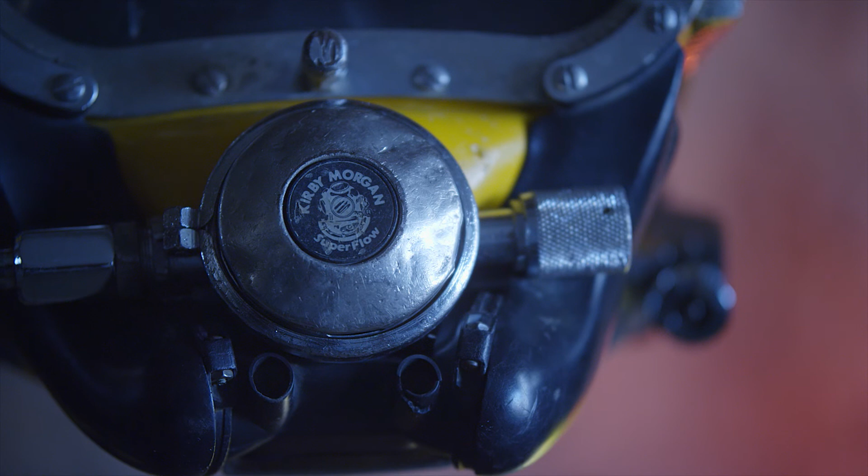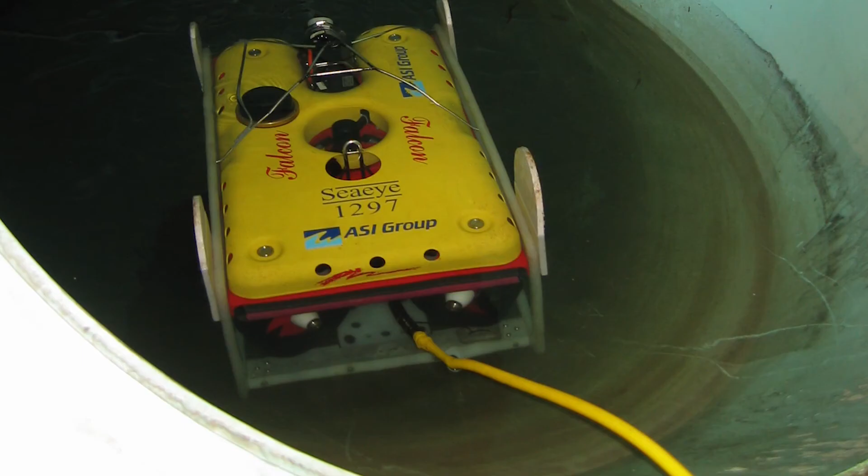ASI is a full-service marine engineering company. We started back in 1987 with the thought of providing strong technical skills with strong professional skills. I still remember our first office was above a welding shop. I think we had 500 square feet, and it was myself and two other people. Now we have 120 employees.

Back in 1990, 1991, zebra mussel infestation in the Great Lakes was hitting its peak. So we started doing mussel control, and based on that, clients would say, well, what else is in our infrastructure? So we had divers go in to take a look.

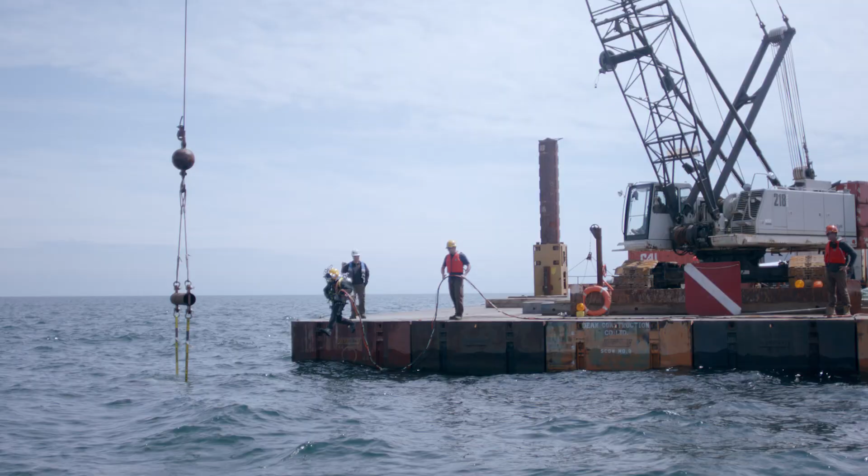What commercial divers can do that advancing technology can't do is give the actual physical hands-on inspection underwater. We're able to do deep water diving, welding and burning. There are times when we're swinging a hammer and nail underwater.

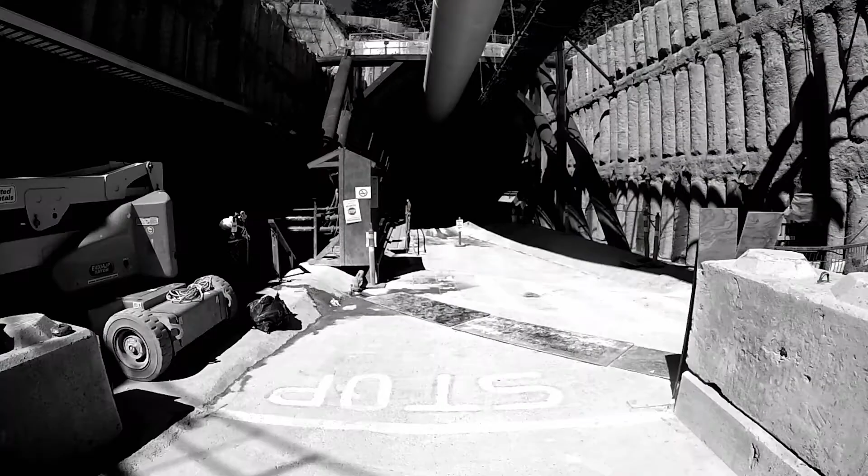Hyperbaric intervention involves putting people under pressure in front of a tunnel boring machine. When a tunnel boring machine goes into soft ground earth, that space is the same as being underwater. Our divers therefore have the experience of working underwater in the same pressurized environment. We're the only company in Canada doing this. It's very exciting and it's very demanding.

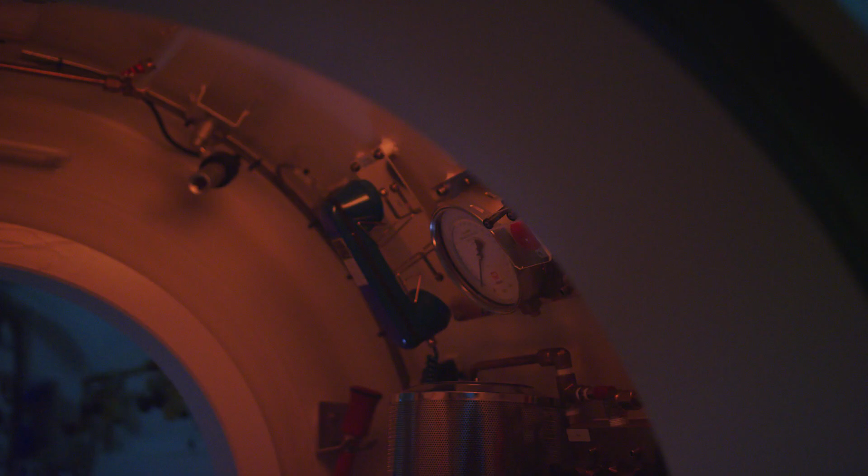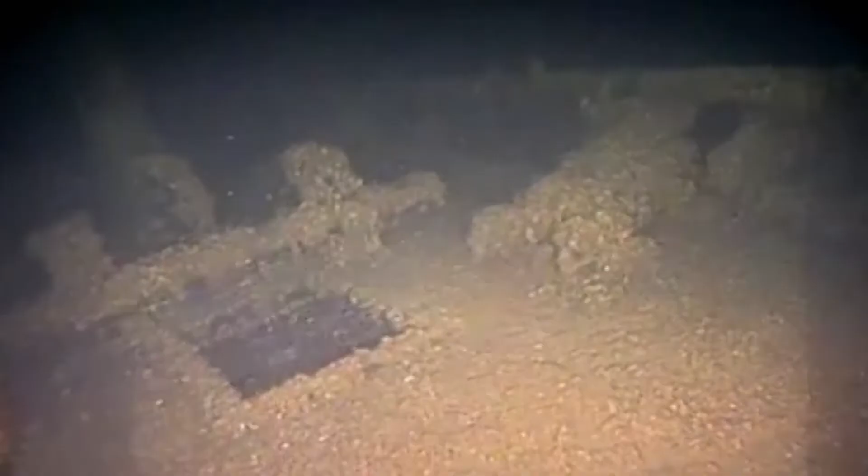Where it was too dangerous for divers to go in, we started employing ROVs, remotely operated vehicles. We saw an opportunity to develop a robotic system to handle those types of projects. We would provide sonar profiling, sonar imaging, underwater mapping, and bathymetric surveys.

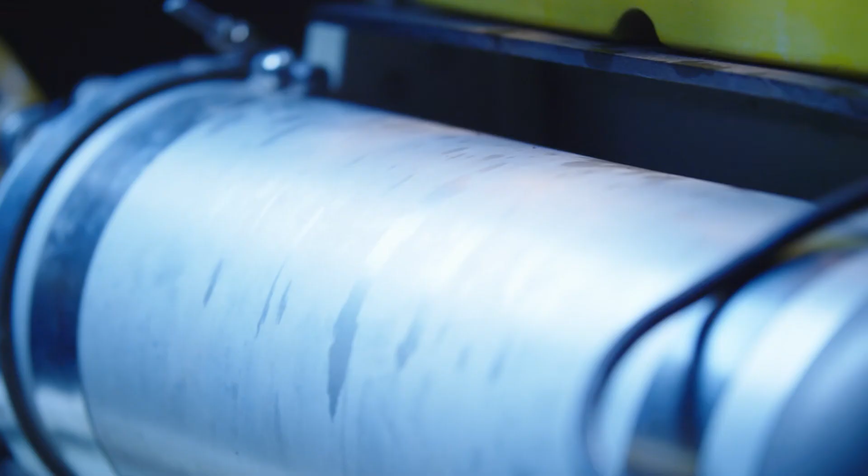The new vehicle that we have is a modified Mohican. The sensors on there have never been combined in that way before. That's what gives us the eyes - we can see in conditions that normally you wouldn't be able to observe in.

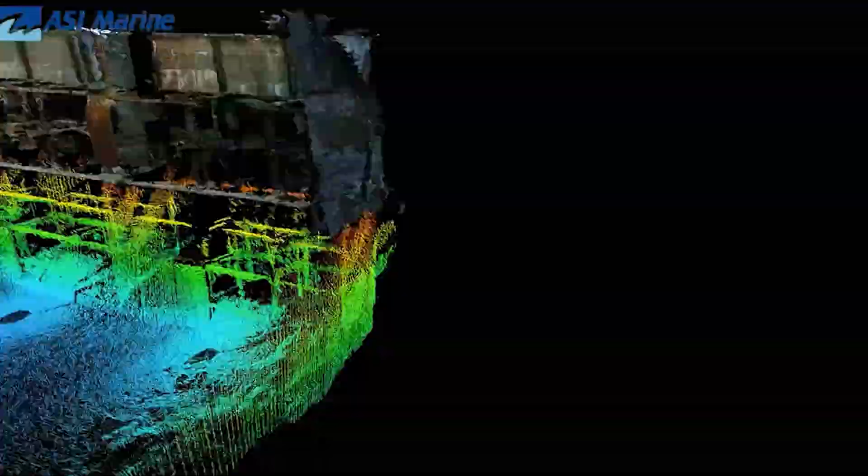With all that information coming back, we're able to recreate that tunnel in full 3D, as if you were able to walk down it. But I still don't think it'll ever be finished. We're always upgrading, always making it better, always working out ways to improve. You always want to be able to provide more.

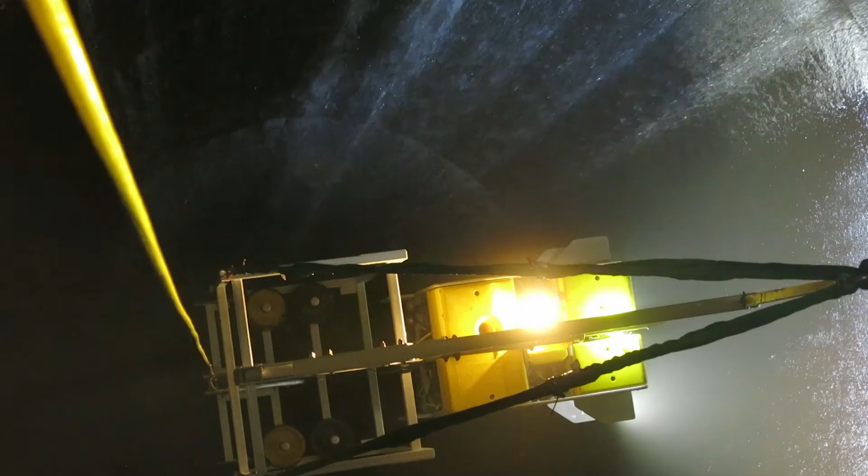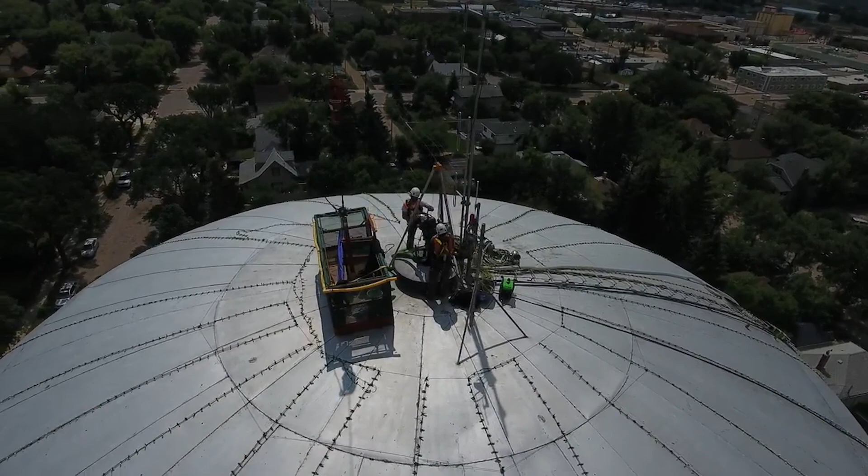We have been active internationally since 1993. We mobilize all over the world. Started in Peru, went to Finland, Australia, New Zealand. Right now we're in Scotland, we've got another one in France. We've opened up an office in Vancouver and in Chile. It's wherever it takes us. Strong technical with a very, very strong professional side - that's the premise that we started with, and it's still the premise today.

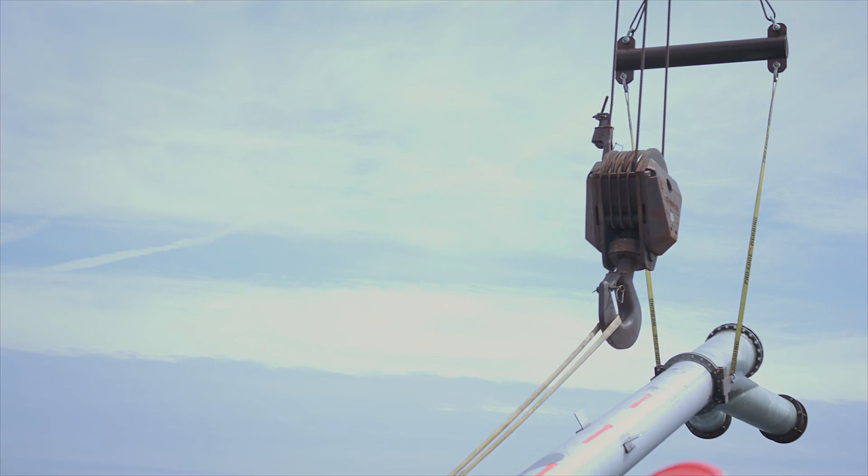ASI is in the business where hazardous work is the norm. There is no room for error. If you think of the services ASI provides, they are very risky. So we've put a lot of effort right from day one on health and safety. Governments, regulatory bodies, certification bodies set a minimum standard, but at ASI we believe in going further than that.

Leadership, commitment, engagement, participation all comes naturally to ASI employees. I believe that's what sets us apart. It's been 30 years we've not had a major incident, no sir, and we won't.

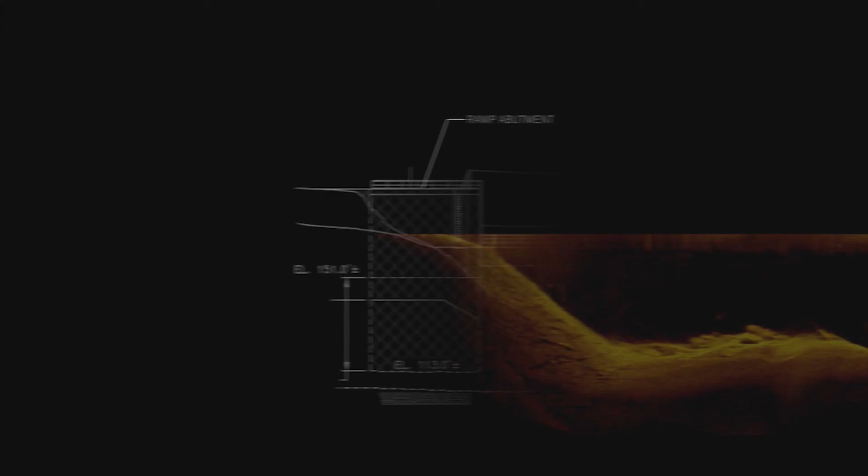The advantage of using ASI is that we provide turnkey solutions, and by that I mean we handle all of it for the client. So it gives the client peace of mind, it gives the client one point of contact. He's not dealing with three or four different companies. I think if you look at the return customers, it's a testament of the work that we perform.

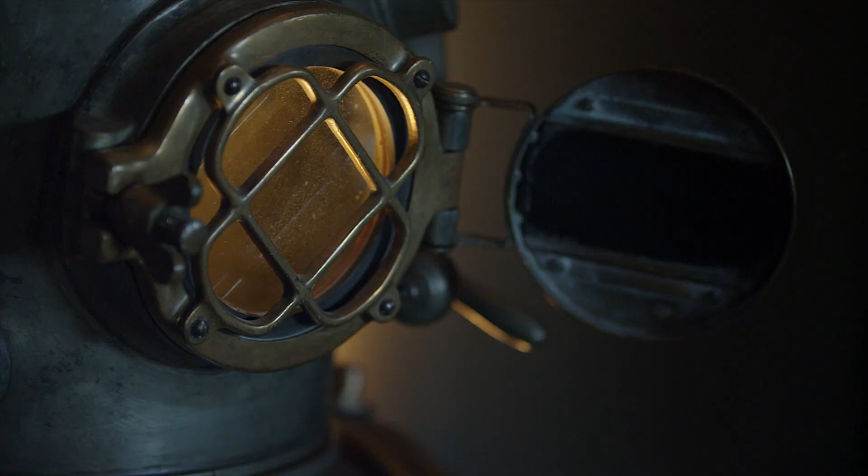If you're asking me personally what makes me the proudest, it's seeing the staff that we have employed here. We've developed such a strong team. There are major issues still not solved in the world in the water industry that could be solved with certain types of technical advancements, and that's something ASI is just poised to do so well right now.